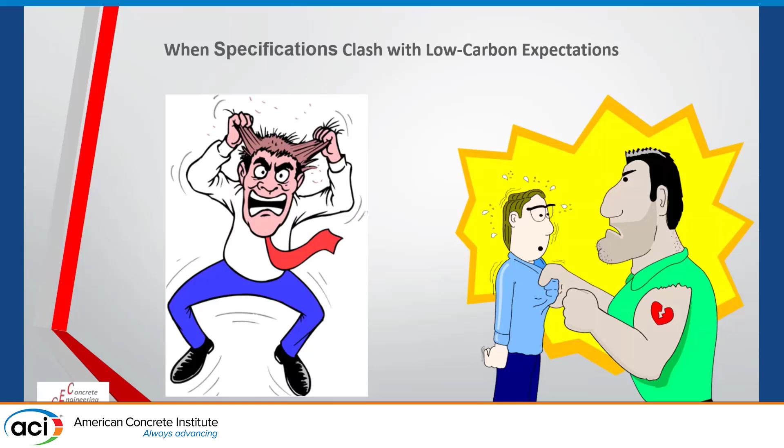One thing to look at is the person beside you. If we can't figure these out, they may not be here. And if you don't have anybody behind you, that may be you that's not here. So I think we need to look at this very closely as an industry, rather than individual groups, as we go through. I'm going to give you the summation of this now.

One of the big things I see is there's a great big difference in this world between an expectation and a requirement. I think that's something you really need to understand, because if somebody expects something from you, that's cool, then that might be it. But it's a world of difference between that expectation and somebody telling you this is what you agreed to do as part of it.

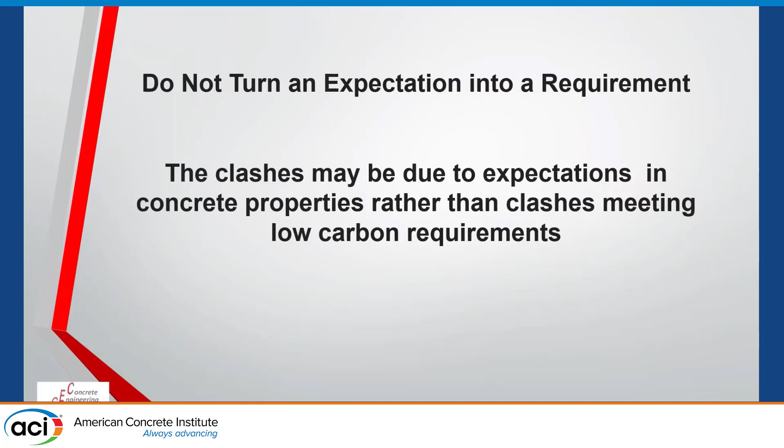A lot of times what Kevin and Jason were talking about isn't necessarily how we're doing what we're going to do to meet the carbon requirements, and what happens as a result of that. We work upstream, we fix this material, we bring it down to this level, we bring it down to this level, but along the way, the changes you get in what you're accustomed to have grossly changed over time.

So a lot of times the problems we have is we're trying to do things like what we used to do. Now, how many salespeople do I have? There's a whole bunch of titles for that: business development, sales engineer, sales associate. But what do salespeople do? They sell.

I don't know very many salespeople who sit down and review the specifications in detail, go through all the requirements in the specifications, go through the reference specifications, and look at that. So if you're selling ready-mix concrete, or selling your services to install a slab, that would probably make you an estimator or whatever, you need to really understand what you're agreeing to do. You need to understand what you're committed to do. So if you have something in the specs that requires a global warming potential of something, you need to look at how that's going to affect you as you go through this.

Now, good ones do it well, they sell. What happens to bad salespeople? They become tech service guys. So, salespeople as a group, they don't thoroughly read, typically they're not the personality to do that. Are you laughing at me? I'm laughing, I said, what are you both? So let me back up. Stephanie's question: if you're a salesperson in tech service, you're either real good at one or both of them, or you're not good at either one of them.

I have no idea. Sales is necessary. If you're a concrete contractor, if you're a ready-mix producer, you've got an investment of a bunch of things, you've got to do something to move that along. You've got to sell that service, but you also need to look at the risk. Jason talked a lot about risk. Well, people, if you're taking risks, you need to be compensated for it, because one thing you need to look at is what the risk is and what the ramifications of the risk are. So you need to understand what you're implied to do and what you agree to do.

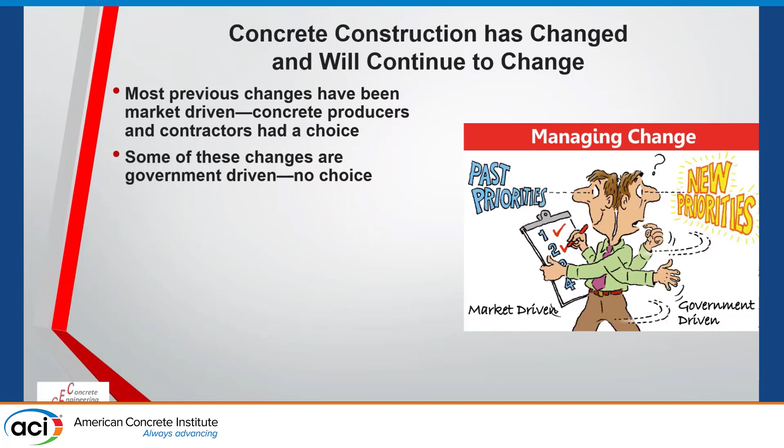And this is a little different here. The changes we have now are not covered by the customer, they're required as part of that. So we don't get to choose about these many times, we have to do this. This is something completely different than we've had in the past, because we could choose not to use fly ash, we could choose not to use admixtures. But you can't get away from the changes in concrete measures that you have to abide by now.

The other part I want to tell you is our industry is very fragmented. You have the material suppliers, you have cement, you have ready-mix producers. They typically do not always work together. If they're vertically integrated, there's a better shot at that. But most of the time, the cement producers make the cement to meet their requirements, produce that, and they're normally market-driven to a point. You have concrete producers who produce concrete, you have concrete contractors. All of those typically do not work together, they're very fragmented.

And now is the time that we need to work together as an industry and have an understanding of what happens upstream with cement, what happens at the contractor level. Now is the time we need to understand, work together as a group to collaborate. And the other thing I'm going to say is probably going to get me in a little bit of trouble, but, you know, we got what we got.

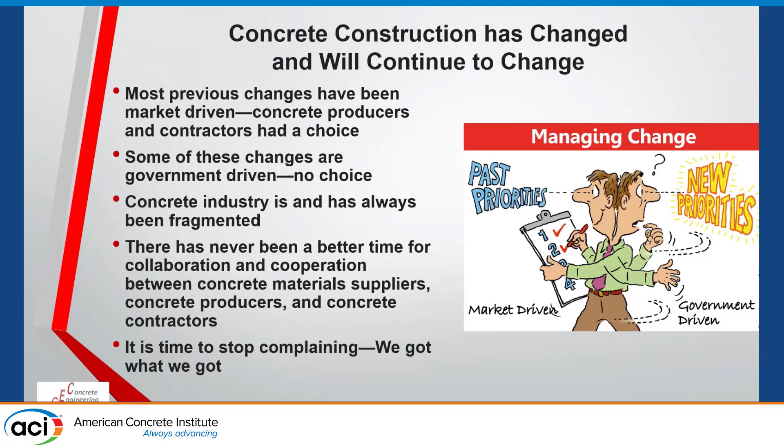Concrete's going to have less cement, less clinker in it. Cement's going to have less clinker in it. So we've got what we got. What we have to do is we got to figure it out. If you bounce around with several committees here, you'll see days talking about various things that we have. All that's great, but what we have to do is figure out how to do this. So we got what we got.

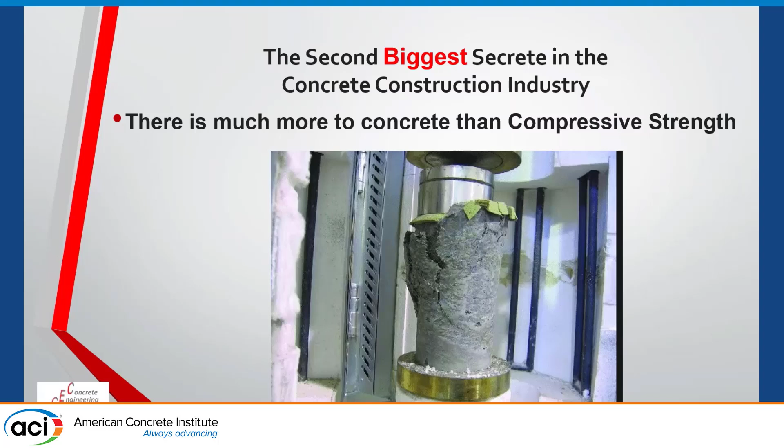Let's move on. I'm going to tell you guys the second biggest secret in the concrete industry. It's very simple: it's not all about compressive strength. You talk to a lot of people, concrete producers, the thing they're worried about is do I make strength? Did I make early strength? Whatever it is. If you look at the issues you see, there's way more problems associated with things in concrete other than strength. It has to do with placing concrete, consolidating concrete, slump loss, slump gain, all of those things are the issue. So if the only thing you're looking at is what can I do to get strength, things are going to probably be somewhat problematic.

Now, I've had these slides for a number of years, but I never thought it's more appropriate to use than that. If you're going to have a successful concrete project, it's a team effort. You have to have a concrete producer who selects materials for what's available to him in his particular area. He's going to prepare a mix design. A mix design has more to do with just compressive strength, how finishability, about slump loss, you need to think about all of these different things. He's got to batch it, deliver it, and then he has to have some level of quality control to make sure that what he is delivering to the project will meet the needs of the project.

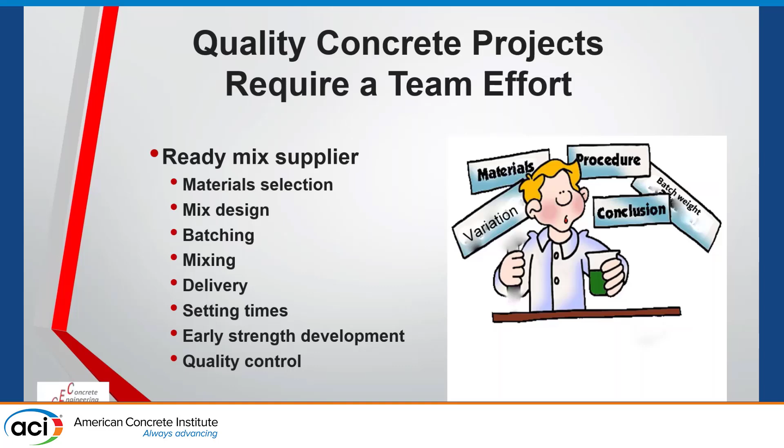The other person you have to have is the contractor. The contractor's in a big change, because now he's getting concrete that's different from what he's had in the past, or she has had in the past.

So he's got to transport. Okay, if we've got form pressures, if you're looking at concrete walls, and you do concrete walls much over about 10, 15 feet, you've got this issue because most forming systems are not designed to hold liquid head once you pass that. Now I've got a concrete mix that's got 20-30% less clinker in it than I had before.

It may gain strength differently. A lot of times I may stick an admixture in it to retard the set a little bit, get the slump I like. So now I've got things setting differently from what I have set in the past. And if you start looking at the formulas in ACI 347 for this, most of those are going to kick you up so you've got a couple feet an hour.

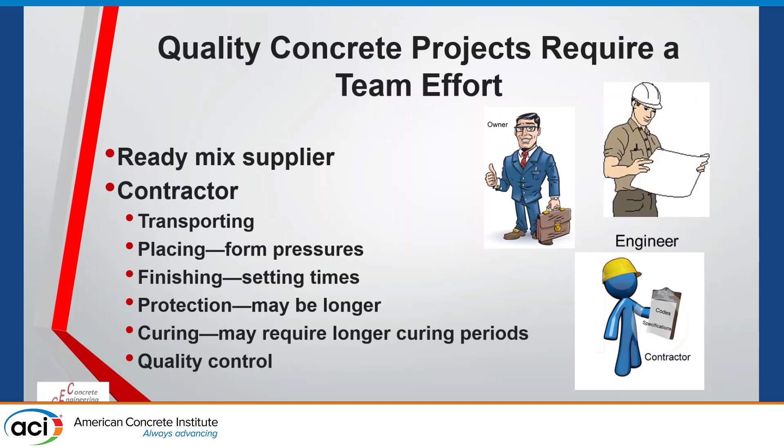Setting times are different. Protection periods may be longer. You may have other issues. Curing periods may be longer. And I'm not talking about this because the specifier told you to do this. You may have to do these things so you can produce an acceptable concrete finish as part of this.

The engineer. Okay, a lot of people in the engineering office think if I can draw it, you can build it. If you ever hear the term 'we'll work it out in the field,' you know you've got a problem like that. So it's very difficult many times to build what's drawn.

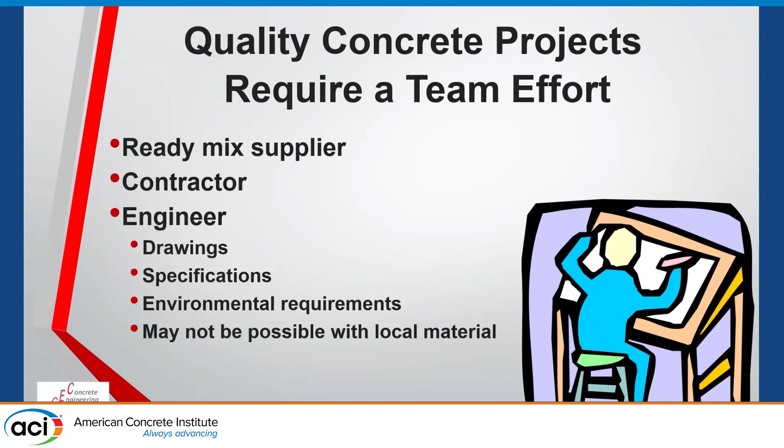But now I've got all these environmental concerns. And the other thing is, it may not be possible to meet the requirements in the contract documents with the local materials that you have in your area. And I think that's something you need to look at. If it's not possible, that needs to be discovered well before you build the project and put a price in on that as part of it.

Okay, the testing agency. So testing agencies, what do they do? Well, they test concrete. But now, proper testing is more important. I've got a concrete mixture that sets slow. I need to be assured that I have proper protection, proper temperature for the concrete surface. I need to make sure I'm delivering those properly. So all of these things become a real issue.

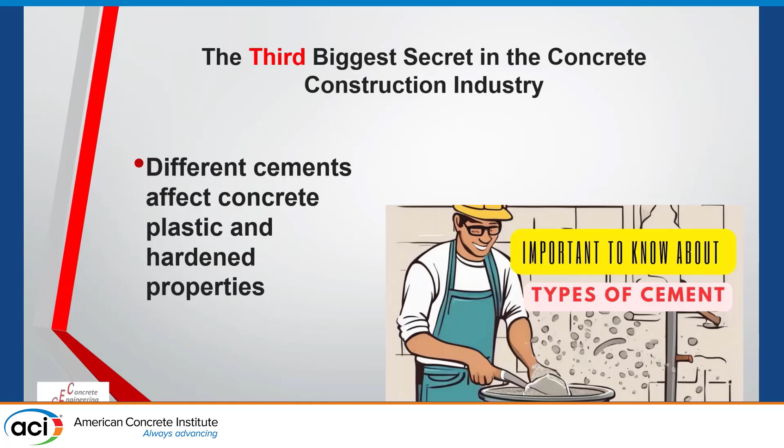And I'm going to tell you the third biggest secret of concrete. We keep all of this hush-hush as a matter of fact. Different cements affect concrete's plastic and hardened properties differently. So you can't drop out cement A and put in cement B. You can't change the cementitious materials around and just do that and expect the same thing.

Now, low carbon cements are here to stay. Kevin covered this pretty good. We're at the tip of the iceberg. Type 1L cements are here. We're going to have more cements with less clinker. We're going to have concrete mixes with less clinker.

It's probably going to take a couple people out, but if you're a concrete ready-mix producer or supplier, or a material supplier, and you think you could drop out whatever you have in terms of pounds per cubic yard of cement and replace it with another—you're going to drop Type 1-2 and put in 1L, that's all you're going to do—you've got a problem. It makes strength, but it's not going to set the same. It's probably going to require a different admixture package and take a little bit more. And the other part is, you're going to have a hard time changing between Type 1L cements.

So let's think about it. So what Jason was saying, the tolerance on the limestone is plus or minus 2.5%. That's a range of 5. Each one of the 1Ls has its own target. So I've got cement A that's got a target of 7.5, that means I can go from 5 to 10. If I've got one with a target of 10, that means it goes 7.5 to 12.5. If I've got the same admixture package in all of those, it's going to respond differently. So one of the things, if you're doing that, you need to look at what happens as a result of this.

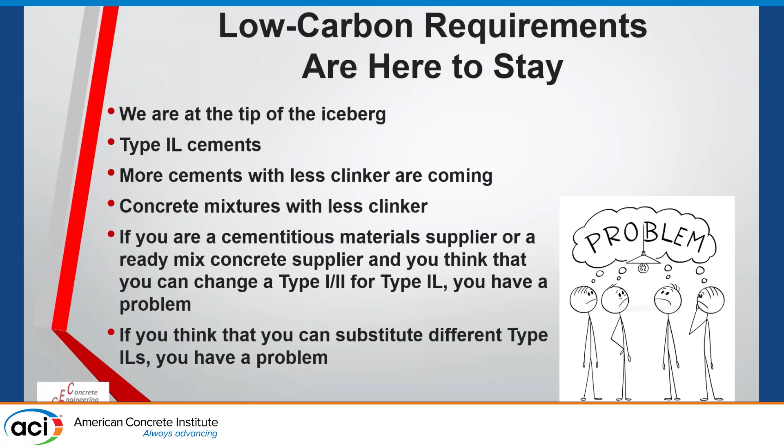Now, Type 1-2s were the same, but Type 1-2s did not vary as much as we're seeing with 1Ls. So one of the ways to avoid issues and challenges is to make sure you understand what you're providing other than just compressive strength. There are some other things we don't know.

Okay, typically—not all, but typically—1L cements require more water. So if it requires more water, then logically it requires more cement, but we typically don't do that. So we either add water or add admixtures. Both of those typically increase shrinkage. If you look at C494, you'll see that if you have an admixture and replace the same amount and drop the water in the concrete mixture that has the admixture, then you get more shrinkage as a result.

So we've got different shrinkages. A good chance it could be more. I don't really think we know about that. I noticed there's a question about that. I don't think we know.

I think there's a bigger problem: more shrinkage, slower setting in some cases, greater chances for cracking. I see a big change and how it responds to cold weather.

But one of the things you look at, if you look at a concrete mixture, you're looking at what's happening at 70 degrees, which is the golden temperature. And then if you drop that down to 50 degrees, I've seen setting times change. So the first one is slow, it may be 6 or 8 hours, more than what we see. Now you're talking about something that's way out there.

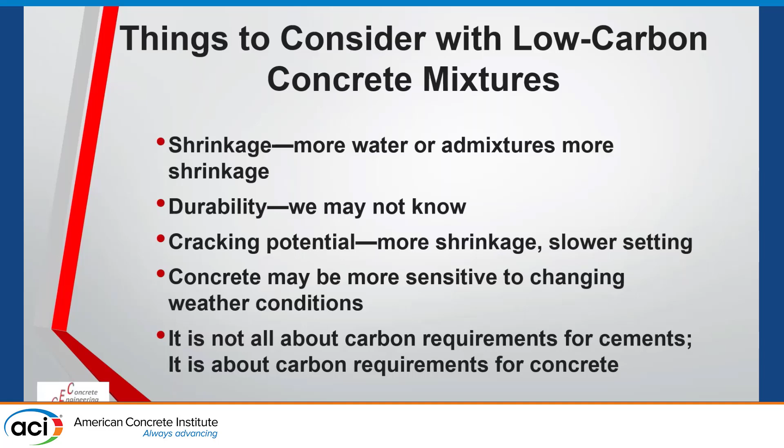So, I was asked to talk about, you know, when they clash. Well, one of the first things I'm going to say is an expectation is a whole lot different from a requirement.

If somebody expects you to do something, or thinks it would be a good idea for you to do something to reduce whatever carbon footprint, that's a whole thing that's completely different. Don't let an expectation turn into a requirement.

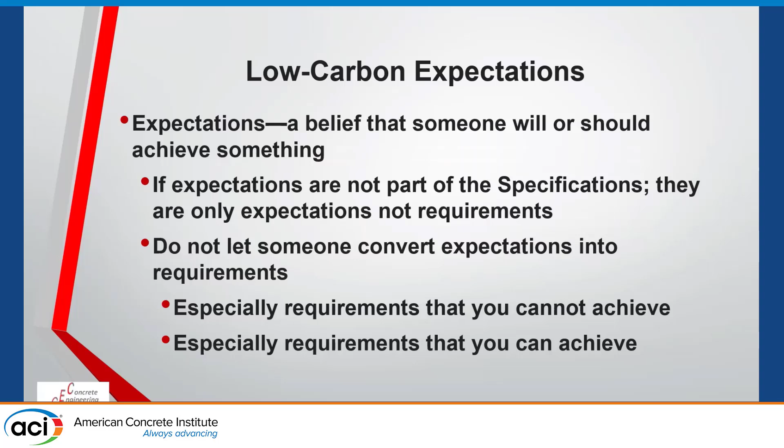I've got the bottom line: especially if you cannot achieve it, that's pretty obvious. Even if you can achieve it, don't let it turn into a requirement. If it's a requirement, you have to do that, or explain in great detail why you're not going to do that. Okay, so what do you get if you have clashes?

If you can solve the problem, solve it. Now, I'm a big believer that people buy mostly not from a specification, but from a purchase order. So typically there's a contract between the general contractor and the subs, and there's a purchase order between whomever's buying concrete. So what did you agree to do as part of that? If part of what you have to do is going to increase your costs or increase your risk, that should be a change order or something that you ask or bring out as part of that.

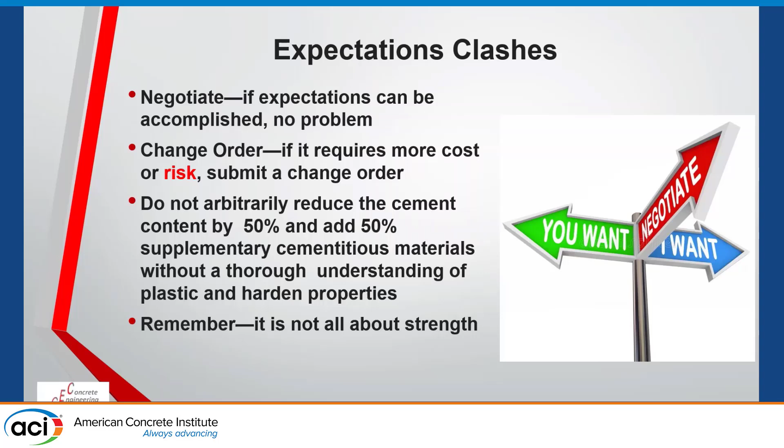If you can't place it, it's totally worthless. Doesn't matter how good it is, if you can't place it, you can't put it in the form, you can't consolidate it. So one of the most important things for the concrete mixer is to be able to place the concrete in the formwork.

Requirements get a little more complex. Requirements kind of vary. There's code requirements - Jason talked about 318, the code, things like that. Then there's specifications. Here's the problem with the codes: most codes are adopted by the building official. ACI 318 means very little unless it's adopted by the jurisdiction. Once it becomes adopted by the jurisdiction, it gives it this funny little thing called law. So you've got 318, 319, 320, 321, 323.

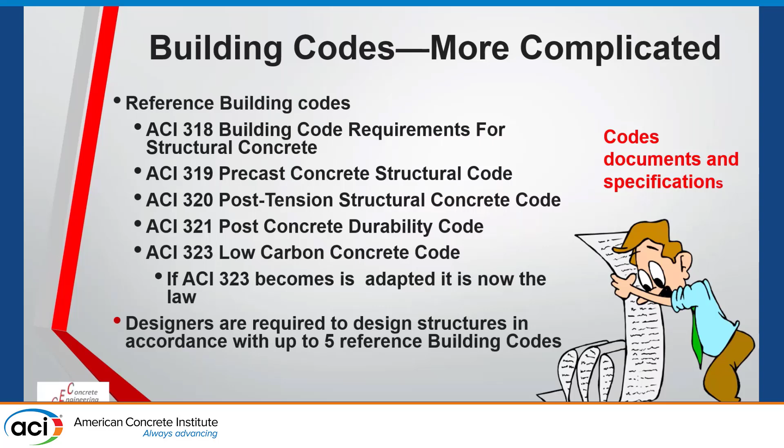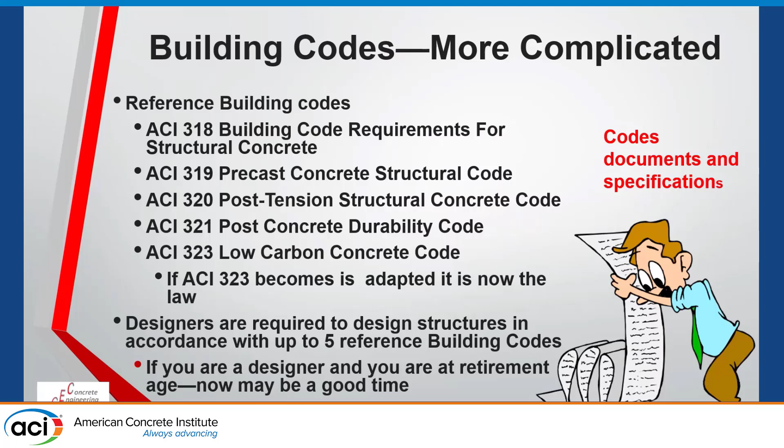When this becomes adopted, if you're a designer, how many designers do I have? So if you're a designer, you're now going to be required to design up to about 5 different codes. If you decide to do a swimming pool or something like that that encompasses this, you've got 6. So my advice, if you're pretty close to retirement, now might be a good time, because I promise you that if I take your design, all 5 of those codes, and give it to an attorney, you don't need all of it. There's something there you don't need as part of that. So it might be a good time to bow out.

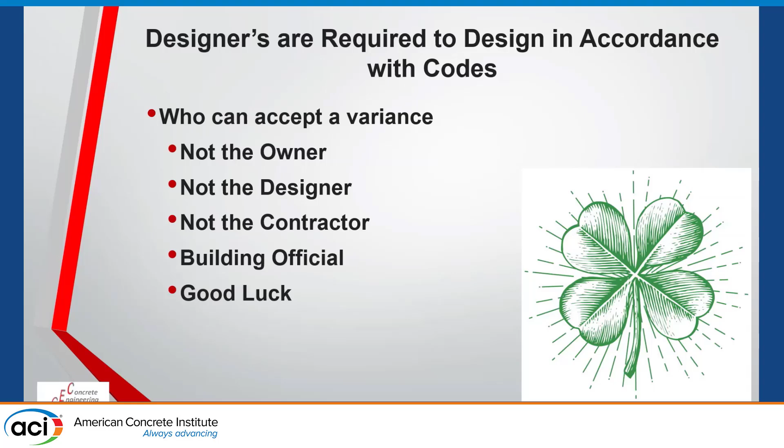Now, if you've got an issue where you don't meet code, the owner can't accept that, the designer can't accept that, the contractor can't. The only person who can really legally accept that is the building official. Good luck with that - he has no interest in that. So when these requirements become codes, there's really no out to that.

Now, specifications, you can make a change - the owner or the engineer can.

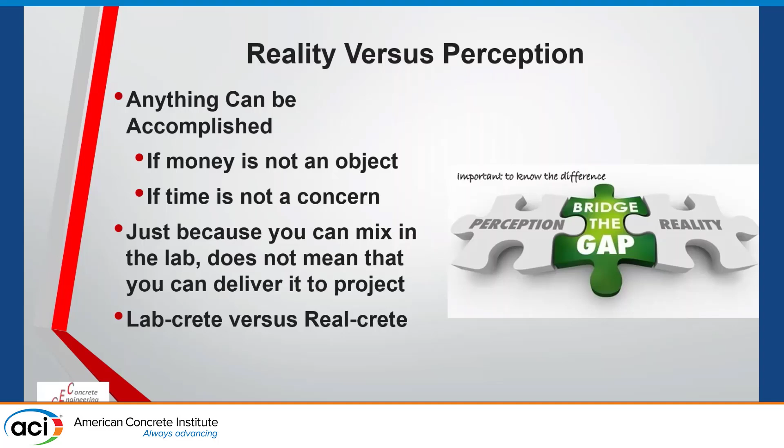The next thing I want to point out, and Jason kind of hit on this: no matter what material you're using in concrete, if you've got enough money, if money is not an object, or time is not a concern, you can do anything. Jason went into this too - if you look at a lab concrete mix done in accordance with C192, it's 8 minutes old. You take that, run your test, make your samples, it's 8 minutes old. Now if you think you can take that mix, drop it out with temperatures ranging from 40 to 80 to 90, haul it 10 to 30 miles, run it through a pump, and expect the same mix, you're making a big mistake. There's a real big difference between those two.

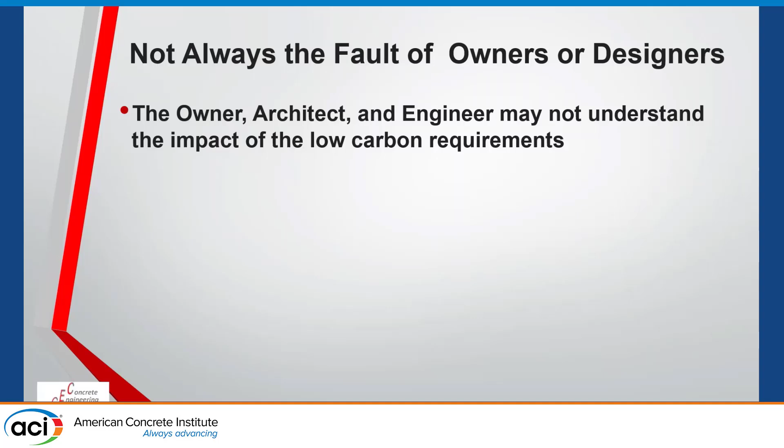The other part - we talk about specifications, codes, requirements - but I think part of the problem is the designers don't understand. And one of the things we need to do to avoid clashes is get out to the design group and make them aware of what they're asking for. Most designers have no idea what the issue of reducing clinker content is. They don't know the impact of adding 50% slag, 40%, on concrete cast in cold weather. They have no idea what it's like to replace that.

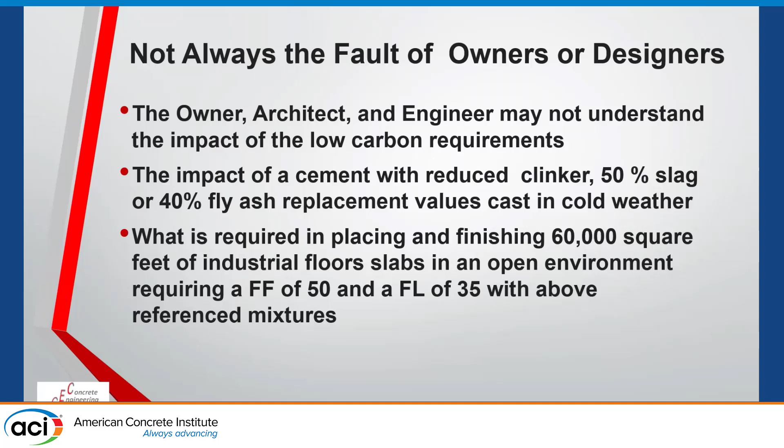I just went to one, about 60,000 square feet. If you're doing a 60,000 square foot distribution center, you've got an FF50 and FL35. So you place 60,000 square feet, finish it, cut joints in it, wake up tomorrow morning and do it again. Very few people have that understanding of what happens. Very few people understand what happens when you're placing slabs with a laser screed, and how that ties back to the importance of predictable and persistent set times.

Very few people understand the value of proper testing. I'm of the opinion that one of the big issues we have is we don't test this product properly. Even design professionals who understand it's not being tested don't understand the value of it. They don't understand the necessity of having flowable concrete delivered to the project, yet they've specified a reinforcing pattern with number 11s on 6-inch centers with a splice every 30 feet.

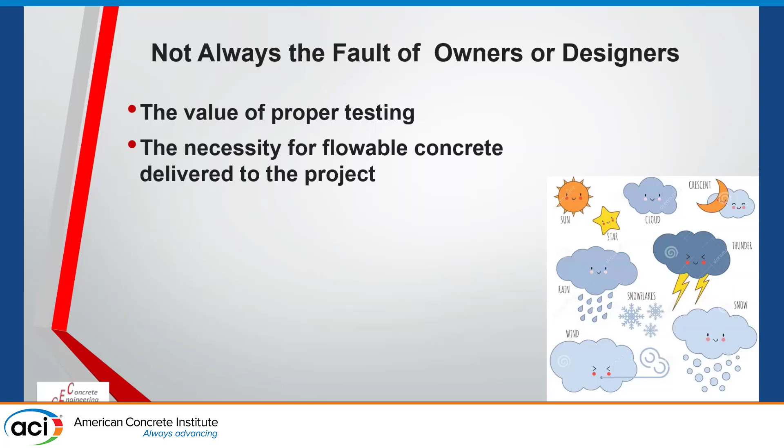You've got 3 layers of it. Then when you get to a door frame, you have more reinforcement around the door frames. And to top it off, you're going to put these cool little diagonal door frames, or a 2-inch bumper thing, or stuff like that. They don't understand that I need a way to get something in here to place concrete. They don't understand what it's like to need 3,000 PSI in 2 days.

Now, you cannot produce that structure at the same budget if you're on it 160 more days. Even if you work out your crews and all of that, you can't do it—it's not going to happen. It's not going to work for the owner, because one of the things the owner's got is construction dollars tied up, and the other thing he needs to do is get the building going. When he gets the building going, whatever he's using it for is going to generate income. So it's a major issue with not meeting schedule—it's not just a little cost as part of that.

So, yes, it's a different thing. So what if we can't do this? There's always structural steel—I can put up structural steel, I can do a slab on metal deck. There's a way around this. They build this out of wood.

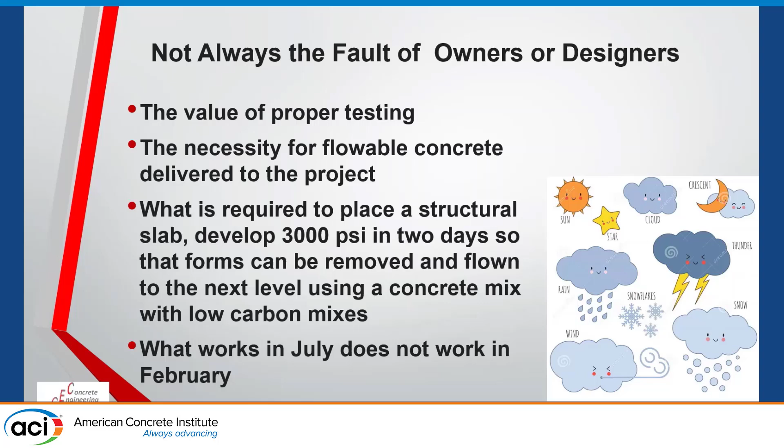What works in Phoenix, Arizona doesn't work in Montana. Now, does anybody here live in the Wisconsin area? Milwaukee, Wisconsin area? Dude, God bless you guys with the best aggregates—they're really, really good. But if you're going to produce a 0.4 water-cement ratio with 500 pounds, you're going to have to carry some serious issues.

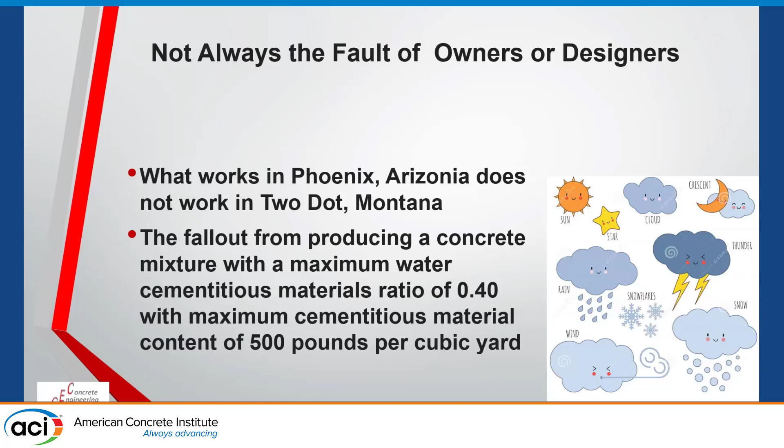Most designers have no idea what the term water-cement ratio really means. They have no idea what happens if you starve them of water and you continue to add large quantities of admixture—I can make that set happen in 8 minutes, or I may be able to make it happen longer, but that's a completely different mix from one that's got a water content that gets you about 1 or 2 inches of slump.

Okay, specifications, drawings, structural notes—if you agree to build it, you own it. Kind of a blunt statement, but just because you didn't read it, I'm sorry. The other part is, this technology exists—can you do what you agreed to do? Sometimes you can, sometimes you can't. Okay, so you own it—what do you do?

Well, the cool thing I think you can do pretty easily is extend acceptance criteria. And a lot of times I hear in the comments, well, I can't do that because I'm worried about early strengths. But somebody's got this cool little thing here—you're wondering what that was. Oh well, I have no idea what it is. This is a cool little thing here: it measures temperature, it measures maturity. And if you look at the strength in most elements, based on maturity, you typically have a higher strength in the elements. So you can look at things like that.